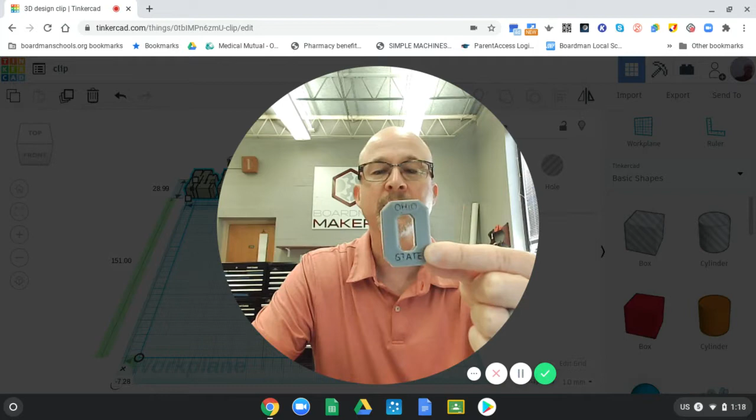Let's get to it. Open up your Tinkercad clip design, and what we have here is your name, the clip art that we brought in last time, and now we're going to put those together.

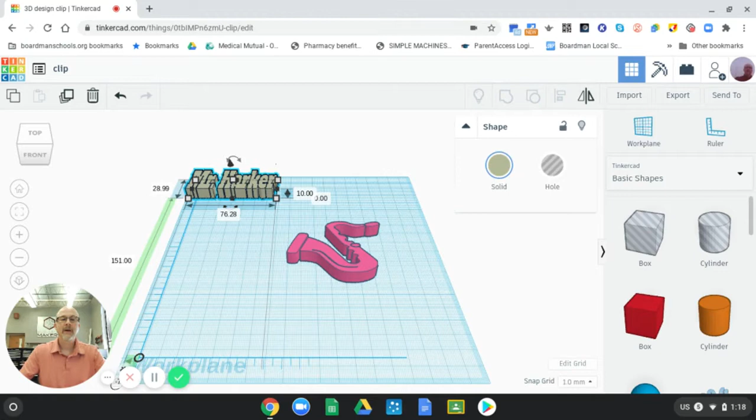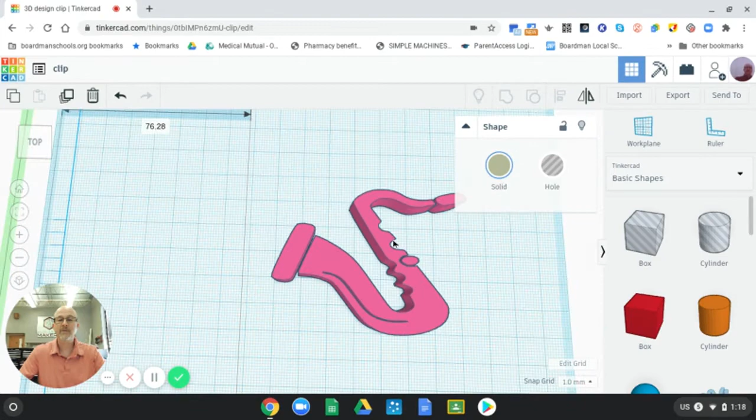If you remember from last time, some clip art pieces or names are not going to stand alone as a base, because when I go to scrape this off of the printer, this is going to fall off. So is that, and so is the mouthpiece. So I need some kind of a base to put underneath it, and I will do that.

Same thing with my name. Rarely will you be able to get words or letters that stick together perfectly where they would stand alone. So this is definitely not going to do that. So I want to creatively put this and this together to make some kind of design, and I'll probably put a hole in it so I can hang it up, which is what I usually do.

Let me show you an example. I showed you this before, but see how there's a hole in there, and I can hang that on a hook. I needed to put this kind of weird shape in here, and I made it really thin.

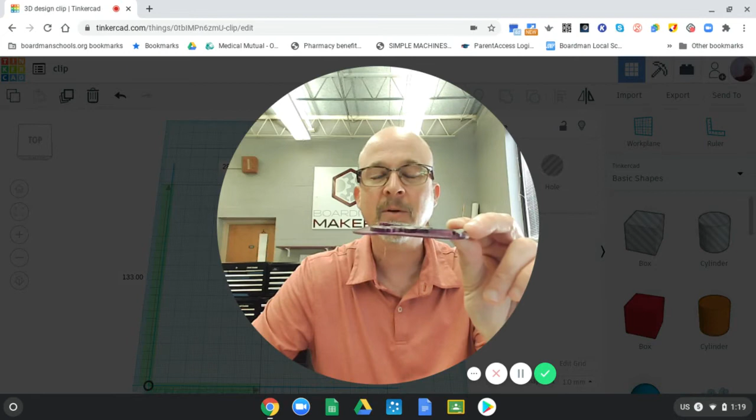When you emboss something, you really don't need a thick base. This is about 2 or 3 millimeters. And then the part that I embossed, the actual picture, is raised up at least 3 or 4 millimeters, because you don't want to waste material. It takes a long time to print, plus it costs some money. So you want to be careful there.

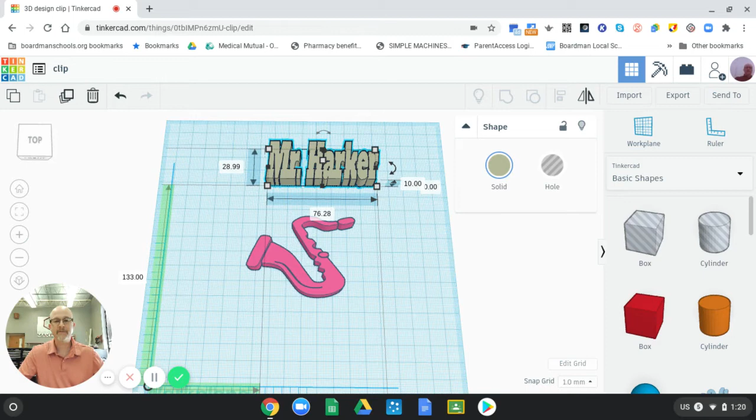If you brought in some kind of a base that works as a clip art piece, then you can just forget putting down a random base. So what I'm going to do is work on putting this together. So I am going to put a base down.

One thing I love to do is I like to use the polygon for bases, because you can make them all kinds of sides and you can stretch them. So I'll probably use that. But check this out, this is kind of cool, this is what I used for this. I made a unique shape. Let me show you how to do that. I might use it, who knows?

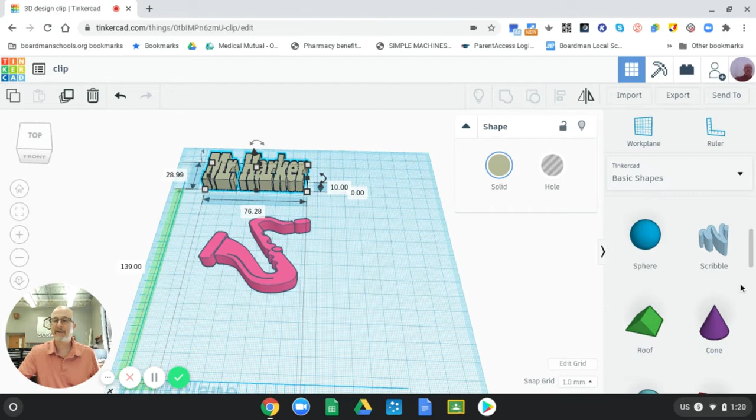It's called Scribble, it's in basic shapes. You click it, bring it over, and you click down. And when you do that, this comes up. So you can draw it, you can draw a shape, you can draw lines, and these are the erasers. The shape closes things in, and that's kind of what I want.

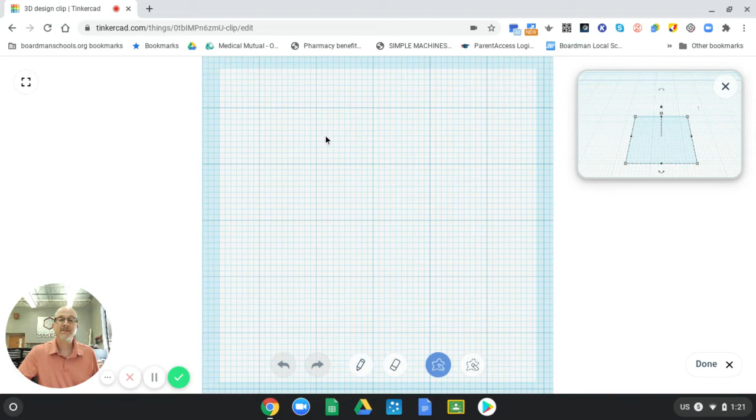If I click this, watch this. Kind of cool. So let's say I needed it to be like really like a wide shape like that. I let go, that's it. It comes out like that.

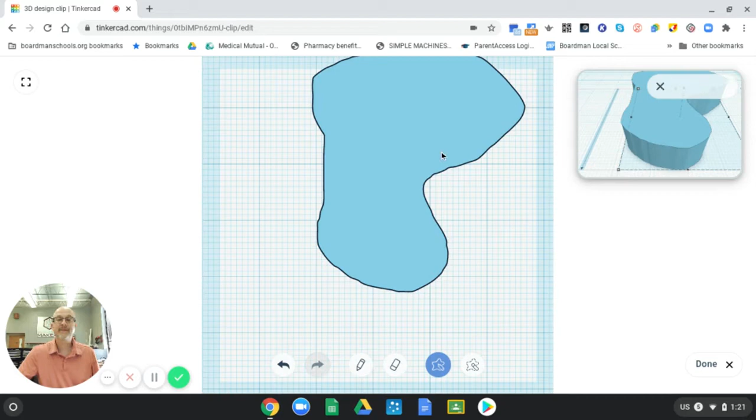Now that looks goofy, that's not great, but that's kind of what it'll look like. So you can make any shape you want. I push the undo arrow.

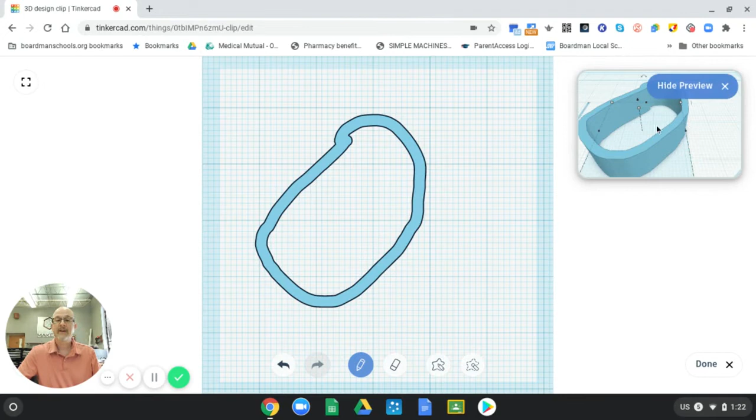If I do this pen thing, the thing is it's not going to fill in, it'll just be those lines. When I let go, it's like a hoop. See what I mean? So that's kind of neat. I'm not going to use that, but I just wanted to show it to you because I have used it before. But I am going to, let me backspace that out.

I'm going to bring in a polygon. I'm going to put it down.

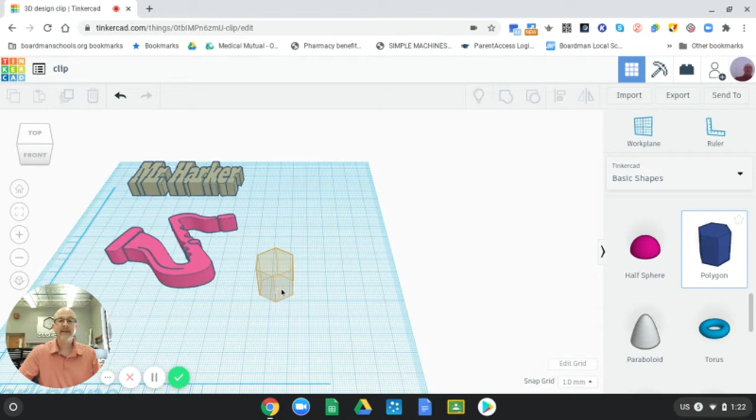Since these things are going to be embossed on here, I'm going to make this quite thin. So first, like I said before, I can make this any amount of sides I want. Let me go with 7. Let's see what that looks like.

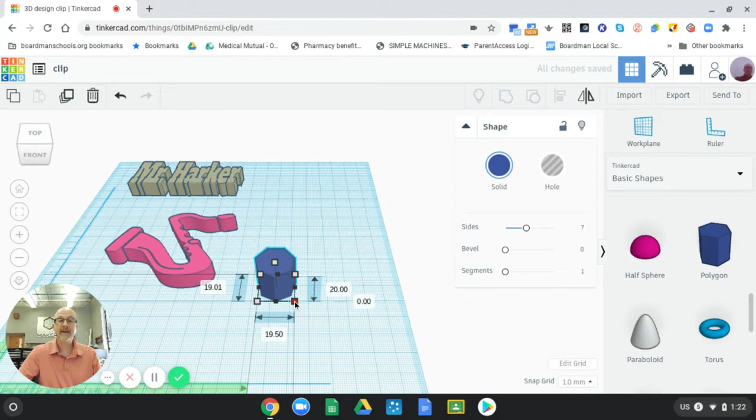So what I'm going to do is grab an end and make it a unique shape. Yeah, that might work. So what I'm going to do is make this like 2, because I don't need it to be thick, I just need it to kind of glue this stuff together.

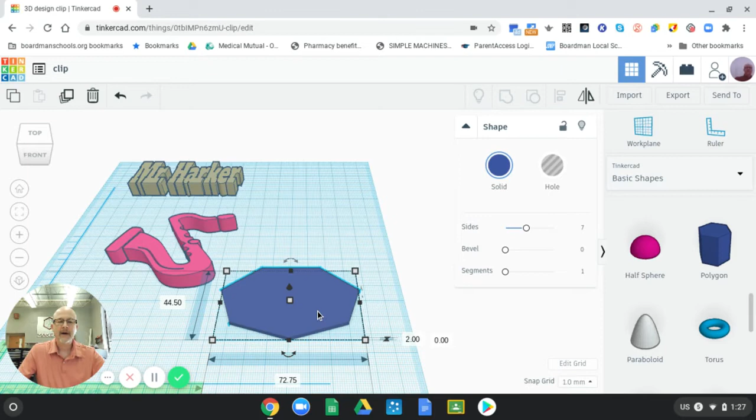So let me pause for a second. I really want you to pay attention to the amount of material that you use. I do not want any part of this design that you create to be any more than 75, and I want the total height to be no more than 6 millimeters. Keep that in mind, and I will put this information in the Google Classroom announcement. I do not want it any more than 75, and I do not want the height to be more than 6 when it's all said and done.

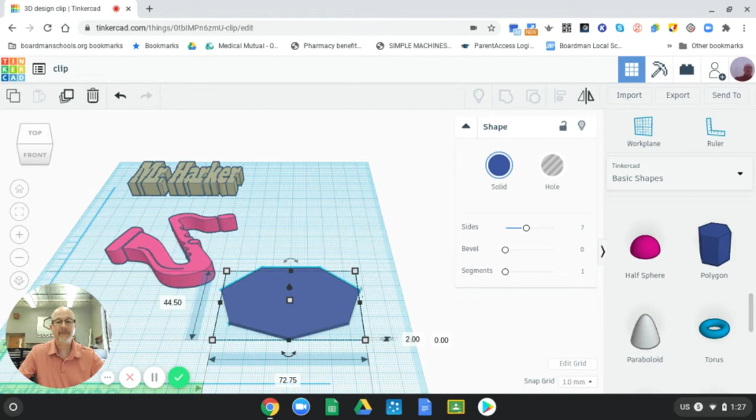All right, so I can just type this stuff in. I will go 75 to give myself as much as I can. And I think I'm going to try 66, just to... I'm going to go 9 sides. I just do not like that. Let's see what happens. There we go. That looks a lot better.

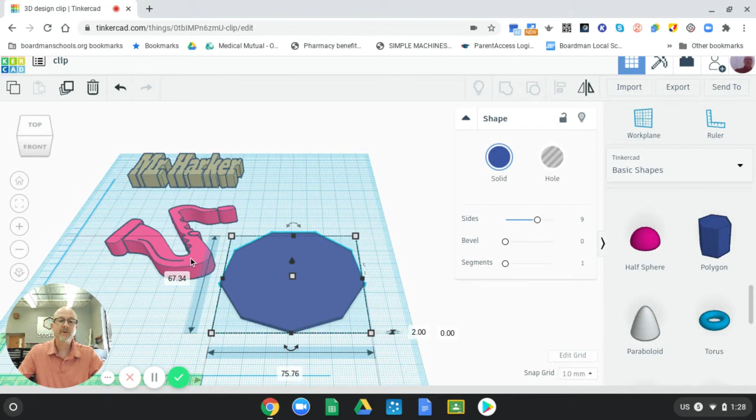All right, so I need to fit this stuff on here if I am going to emboss it, which is my plan, emboss it. If you're going to emboss, once again, the base should be pretty small. 2 millimeters will be fine.

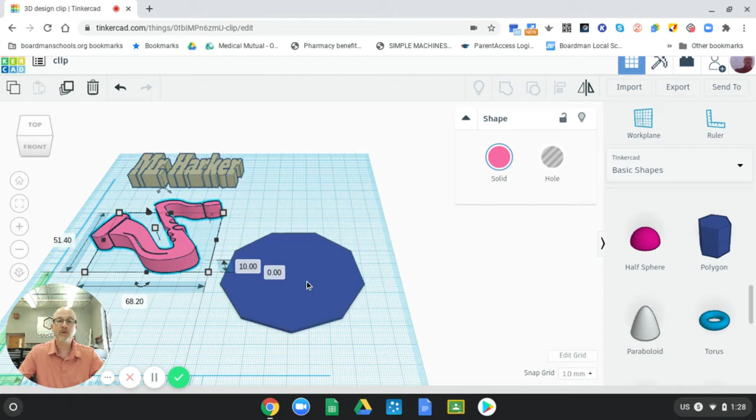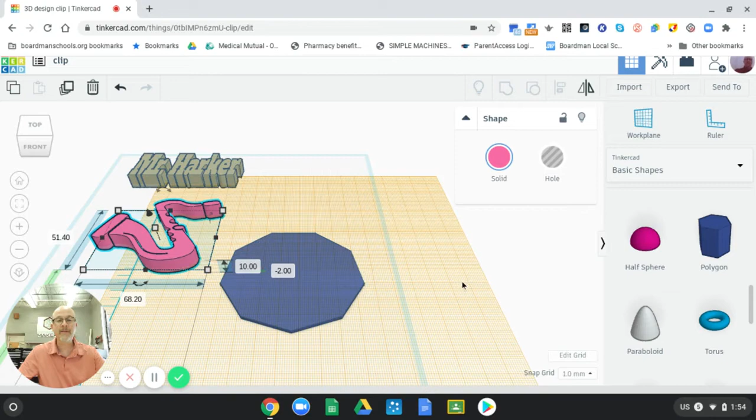So what I'm going to do is put a work plane down. When you emboss, you need to put a work plane down. So I just need to size this up to fit on here. I've dropped the work plane again. And the thing is, when we brought the words in and the clip art, they came in on the bottom work plane. So as you can see, they're not raised up. So this is what we have to do. When you import stuff from Google Drawings and from Google, they're going to come in on the lowest work plane.

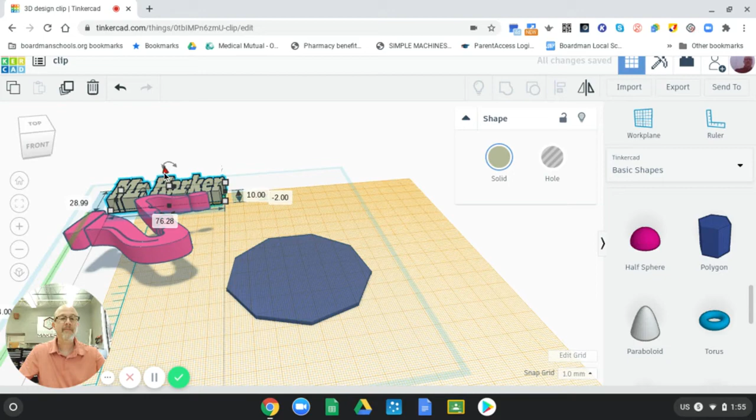So you click on it and you're looking for, you might have to twist some things around, looking for this black cone. Grab it, raise it up in the air. Might as well do it with the other one as well. Now it's floating up, okay? So what we need to do is, as soon as you do that, when you click, since you dropped the new work plane, you click D for drop, and they're both just going to fall down on that plane.

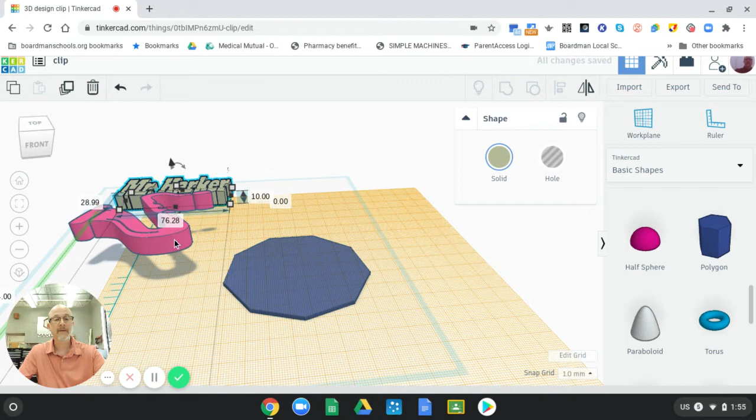Let me click on the other one. You have to select what you're going to drop. D for drop, and now they will sit flat on there. So that's very important. When you're embossing something, you have to use a work plane when you're adding material to other material.

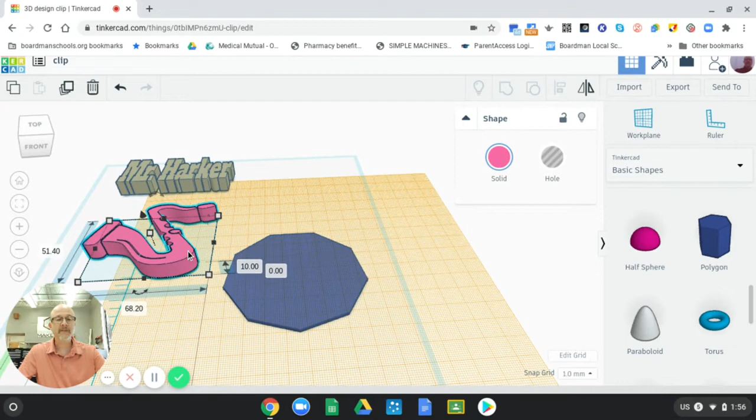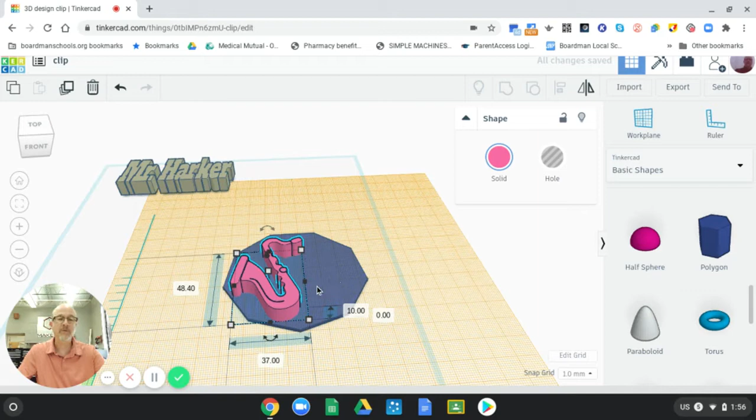So at this point, I'm going to just move this over. And this obviously has to go way smaller. Now, if you want to keep it the same shape, you hold Shift down and it'll lock it into place and keep the same shape, but just make it smaller. Or you could free-for-all it by not holding the Shift key down. This way you can... oh yeah, that's cool.

That's the way you can move it around and reshape it a little bit. So I'm going to do that. I like the way this is looking. I'm going to jam that in there like that, so it's on the base really well.

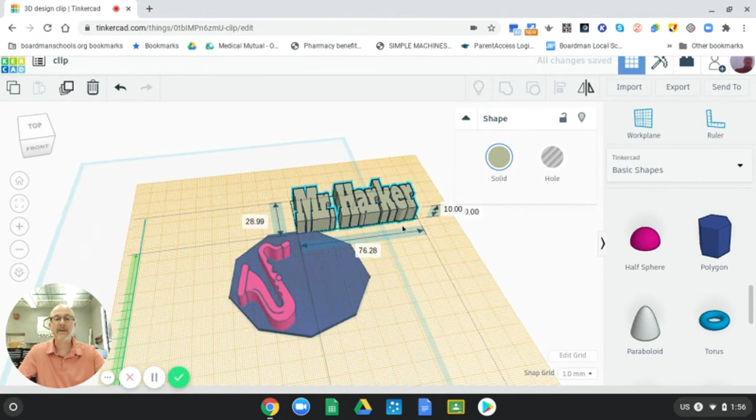And let me show you this. So I already dropped my name. I want to get this to fit over here, but it's not oriented correctly. So I will need to shrink it, I assume, but I need to turn it, like this. So you look for these arrows, and oftentimes you do need to move your mouse around, right click and pan. I'm looking for this one.

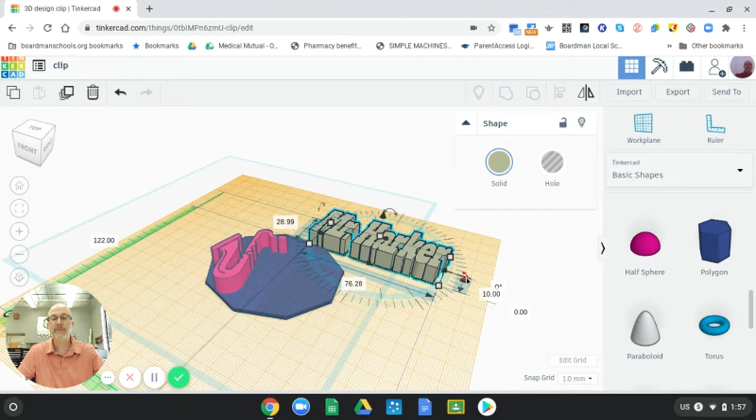And when you put your mouse over it, it shows you what it'll do. There's a couple ways to do this. See, I can't see it really well. There we go, so you have to move your mouse around. If I click this and just tap it on that arrow, just once, boom. Whoop, let me do it again. Boom, okay, so now it kind of is locked into that tool.

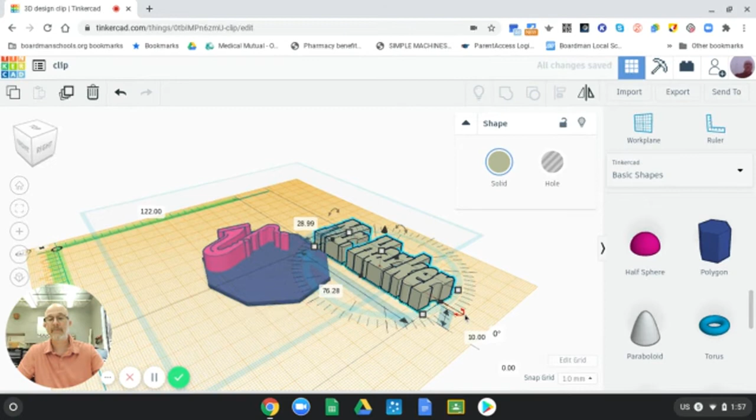I can type in right here. Whoa, I could type in the degrees it is if I wanted to turn it 90 degrees or whatever. Or I could grab the arrow, and the farther out you go, the more detailed it'll be. If I put it close in, it chunks like this, like that. But the farther out you go, the more control you have. So I'm getting closer.

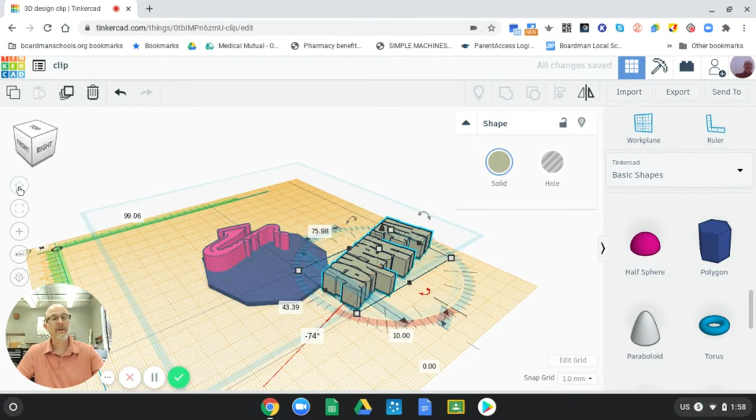All right, I'm going to click the home button, I'm getting a little lost here. Okay, there we go. Bring it over here. It's way too big, so what I'm going to do is grab a corner, shrink it up, and get it set on there.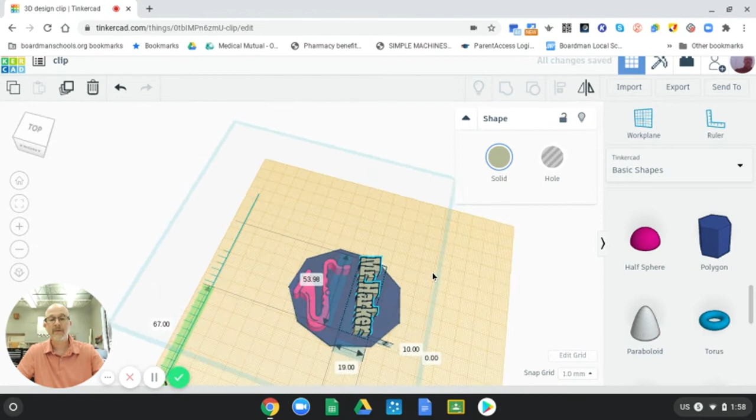Okay, now it's fitting on there pretty well. Do I like the way it looks? I think it's okay. All right, now what I want to do, they're both on the right plane.

I'm going to get rid of this work plane, go back to the normal one. W for work plane. Or I can just click up here and then click off into space over here somewhere.

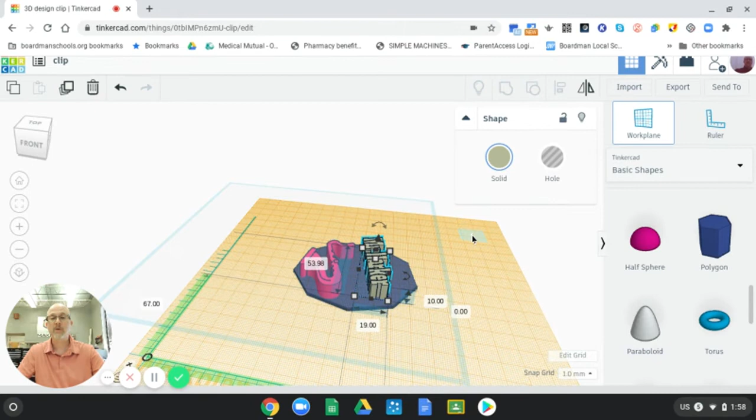Now, when you're doing this at home, you're going to have to pause and rewind, and this is not easy to do the first time. You're going to have to play around with it. So instead of me repeating myself here, just back it up, push play, pause, and work yourself through it. That's just the way it's going to have to be.

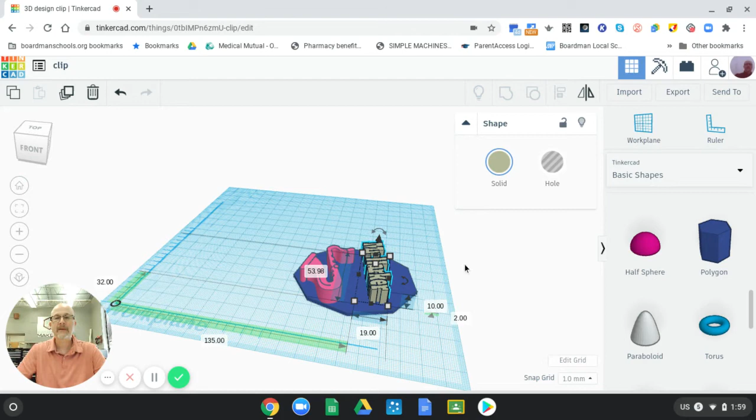Okay, so this is all embossed, but as I stated before, I want the total height to be 6 and no more. So I've embossed this. Right now, the words are at 10, the base is 2, that's 12. If I were to group this, it'd be 12. So 2 plus what equals 6?

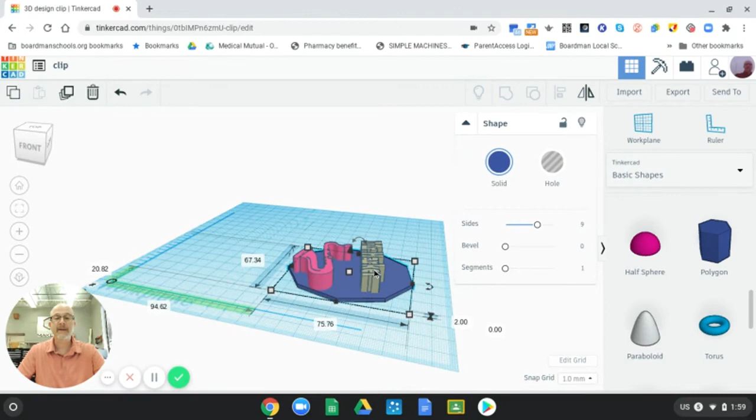4. So I need to click on my name first and find the height, and I'm going to go 4. And then do the same with my clip art piece, saxophone, and make that 4.

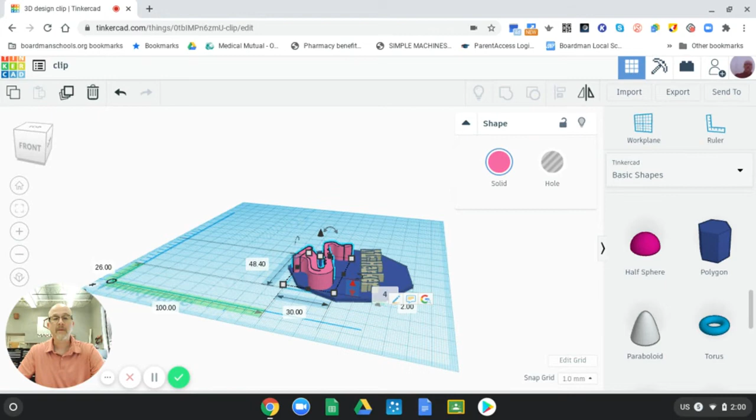All right, I'm not going to use the alignment tool because I'll just eyeball it. Okay, so I'm going to get a top view. Oh, that looks pretty cool. I love it. Okay, I'm pretty happy with that.

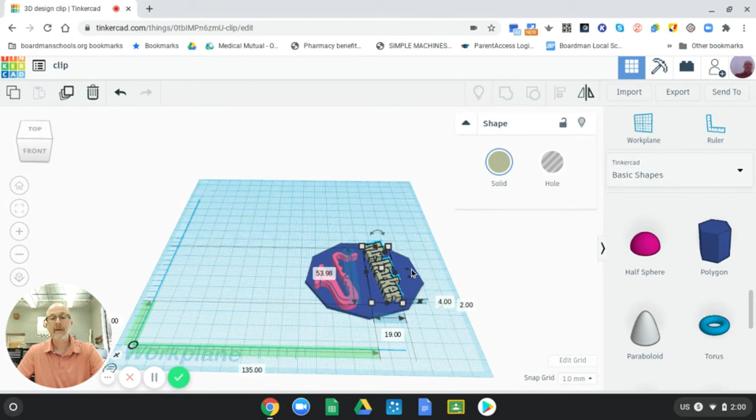I might want to tilt my name that way a little bit, so I'm going to click it and move it just a little, like that. All right, so I'm happy with that.

I'm going to highlight everything, group it. Now everything is together. Check it out.

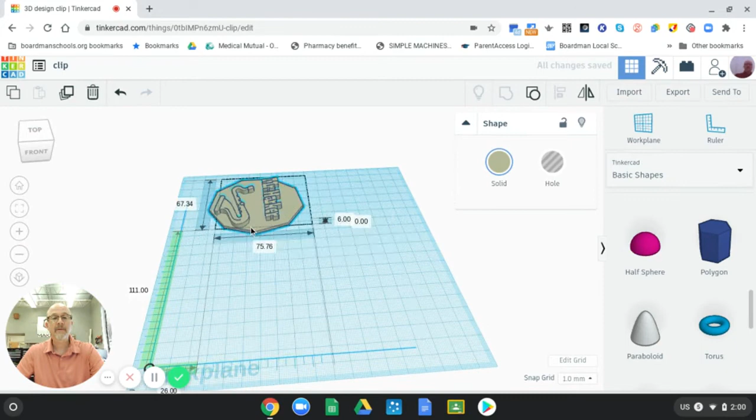Now that I've gone over some emboss work, I'm going to show you how I would maybe cut a hole through, just to remind you of that, and etching.

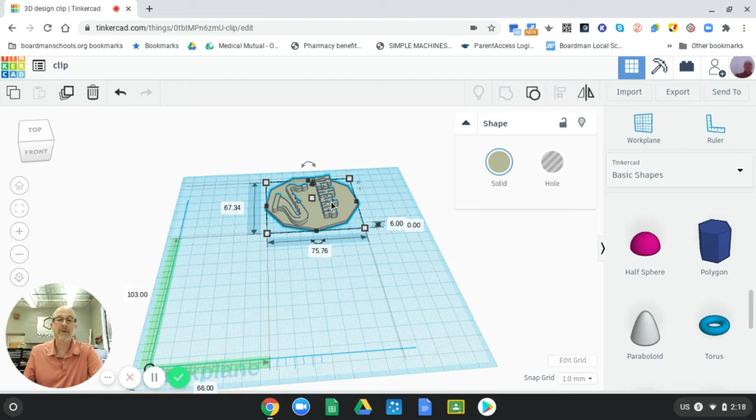So what I'm going to do, I think the easiest way is I'm going to duplicate this and then keep this and work with the other thing. So to duplicate, you push Control key down and tap D, and it should make two of them. There it is, I made two of them.

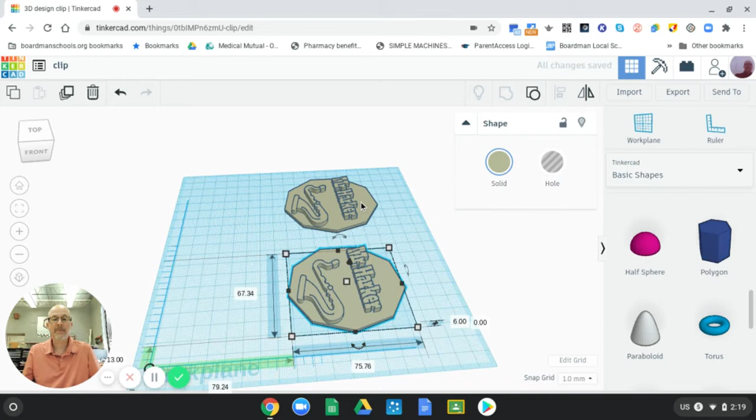So I'm going to put this one aside because I like it, and then I'm going to work with this one. So I'm going to highlight this whole thing, and I'm going to go up here to ungroup.

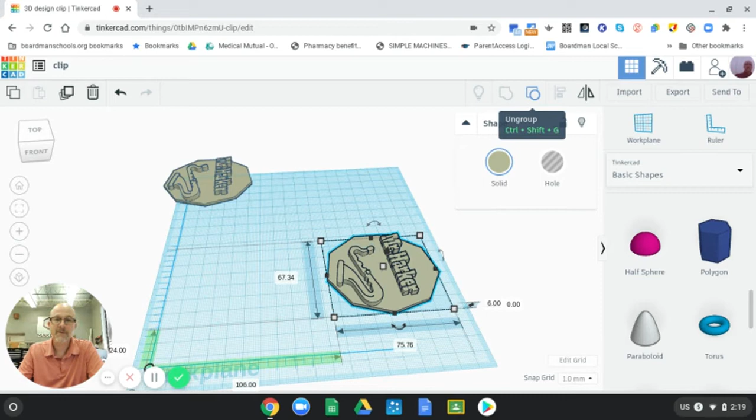Now let me talk about ungrouping again. Ungrouping, as I said before, it remembers all of your groupings from the time you started the design. So that could be, shoot, a year or so. It remembers all that. So when I ungroup it, I should be able to activate all these parts again.

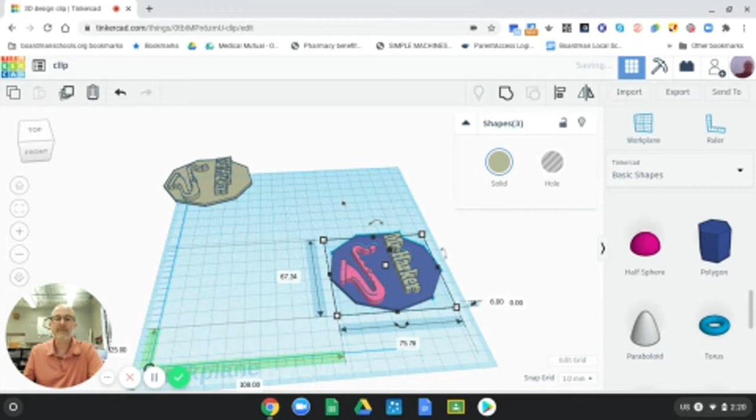So I'm going to just quickly do, whoops, let me double click it. They're not separating, sometimes you have to do this a couple of times. Let me click away. Oh, now it's lagging. Okay, now I can separate these.

Okay, now I'm going to drop these down to the bottom work plane because remember I raised them up when I created this other thing. D for drop. I'm going to drop this one to the lowest work plane.

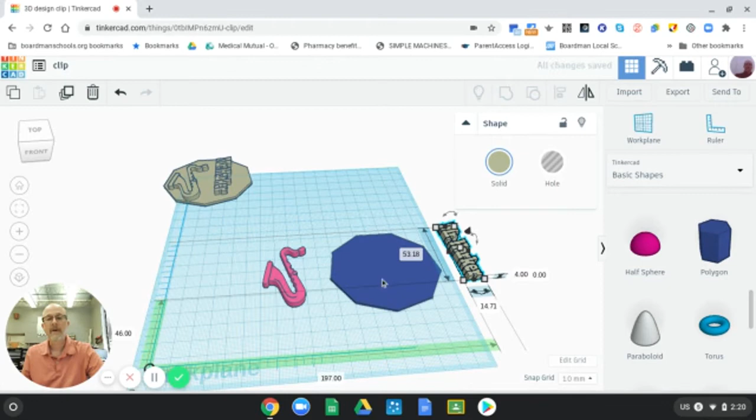All right, so I'm going to pretend like, since I already sized this, if I'm going to hole something through, for instance, I could leave this at 2. That would be fine, it's thick enough. All I would do is make these into holes if I'm going to hole it all the way through.

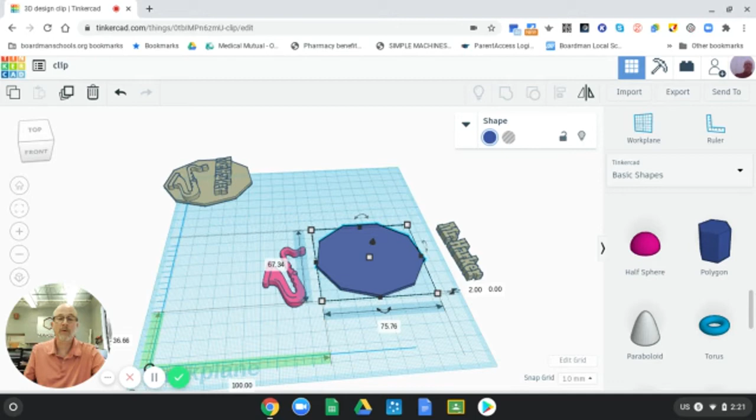So I'm going to click on this saxophone and click hole. I'm going to click on my name, make it a hole.

And now I have to realign them. Now remember, these are, what, 4? So 4 is taller than this base, which is 2. So it's going to be able to cut all the way through, no problem.

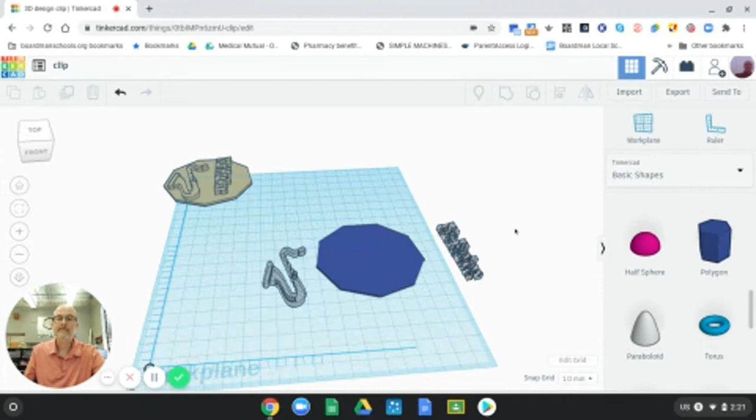Or sometimes, anytime I hole something all the way through, I will make it a little bit taller at times. Boy, is it slow working now. Here, hold on. Okay, sometimes I'll do this, make it a little taller.

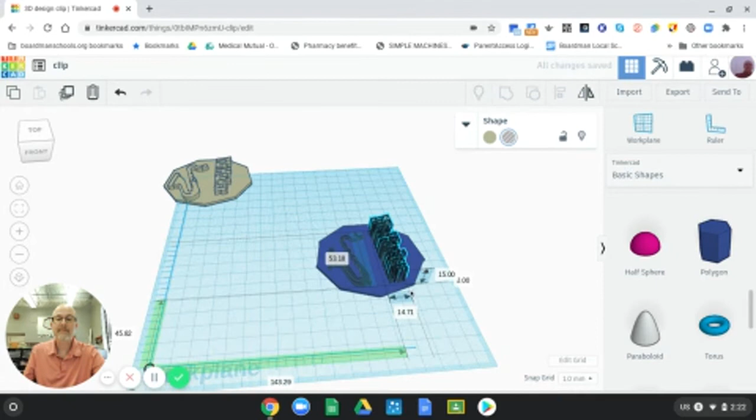It doesn't matter. Okay, so I'm going to slide these over and align them like I want them. Remember, they are holes, and since they're on the same work plane, I drop them down, they're cutting all the way through. So to hole this out, all I need to do is group it.

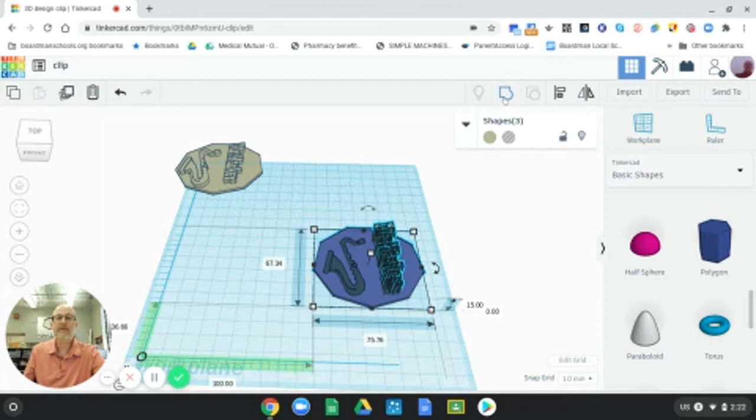Okay, when I group it, it will cut all the way through. It may not be a good choice to cut all the way through, but there it is.

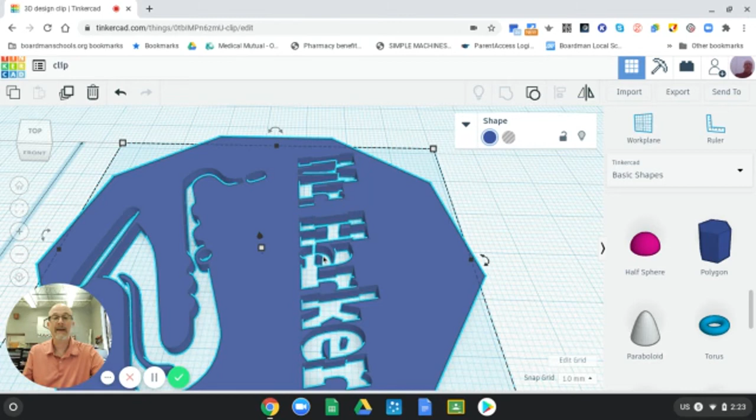See that? Kind of neat. The problem is, let me analyze this. Since I cut it all the way through, when I peel it off the bed of the printer, this part of the E will go away. It's not attached to anything. This part of the A, so that's not going to look great, unfortunately. The rest will look fine.

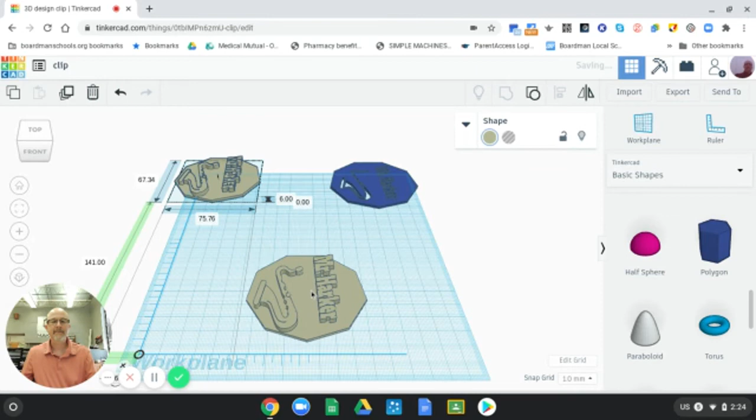Let me push home and show you etching real quick. So I'm going to do the same thing but etch, and go through that. I'm going to duplicate this again, Control D, and peel it apart. Okay, now I'm going to ungroup it.

Mr. Harker, I come to bear a gift that's really yours that I'm returning. I'm sure you knew. Sorry for the interruption.

Now I ungrouped it and I have activated everything, so I'm going to etch it. Let me review what that looks like. Remember, etching is just carving in, but not all the way through. So like this, the Ohio State is not all the way through, it's just carved in. So that's what I'm going to do here.

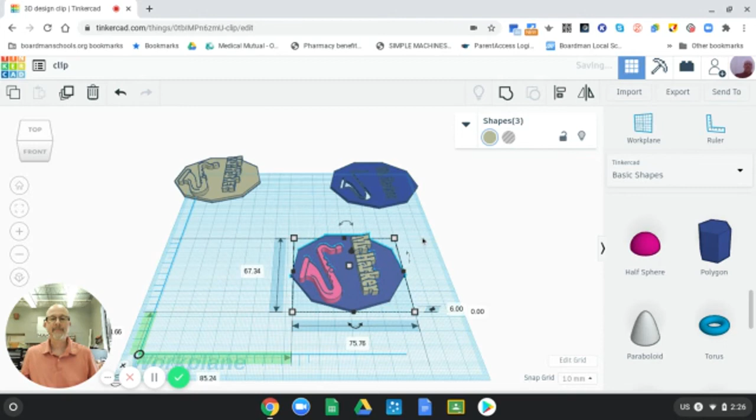So what I'm going to do is pull these away again. Whoops. When you ungroup, it's a good idea to click away and then you can peel things off. Please excuse this interruption, teachers.

So now I'm going to go over the etching process with this same thing. And to review what that is, let me make myself bigger here. It is carving in, like in this. The Ohio State is carved in, but not cut all the way through. And sometimes that's a good option instead of holing it all the way through.

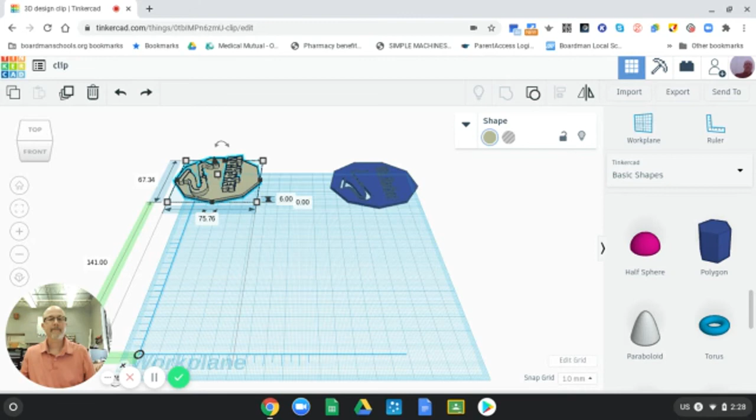So I'm going to show you how to do that with the same material here. I'm going to click this and duplicate it, Control D, peel it off, and then I'll just manipulate this. So I'm going to ungroup it and get these things out of here.

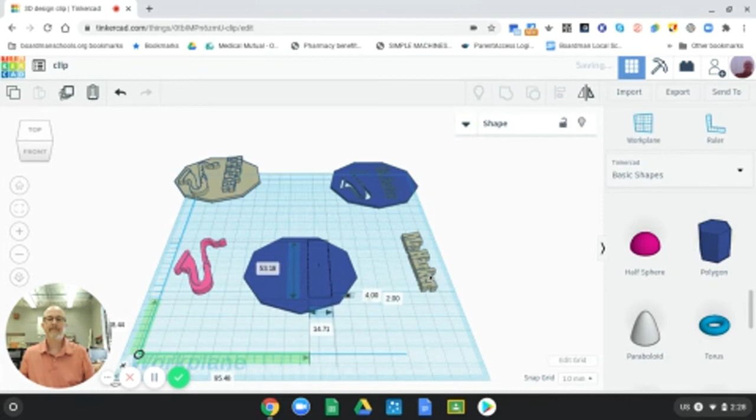The saxophone off of there, and Mr. Harker off of there. And remember, this is really important. Let's drop it down.

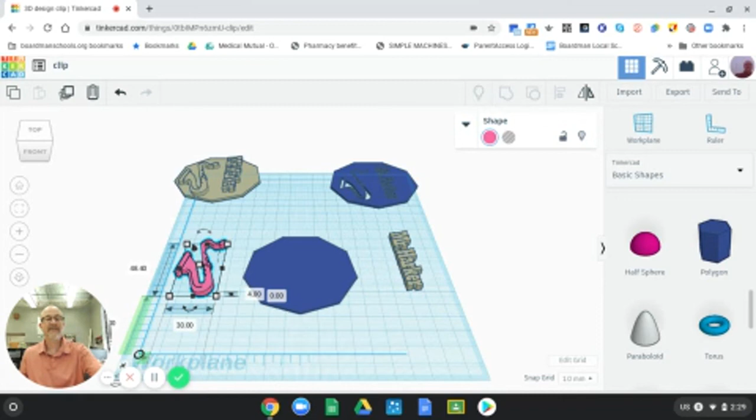It needs to be on the bottom work plane. All right, when you etch something, you want the base to be thick because you need some material to cut into. So it's really important that you have these things that are going to be cut into it on the bottom work plane, the same level as your base. That's important, and that's what we just did. I selected them, clicked D, and dropped it to the bottom work plane.

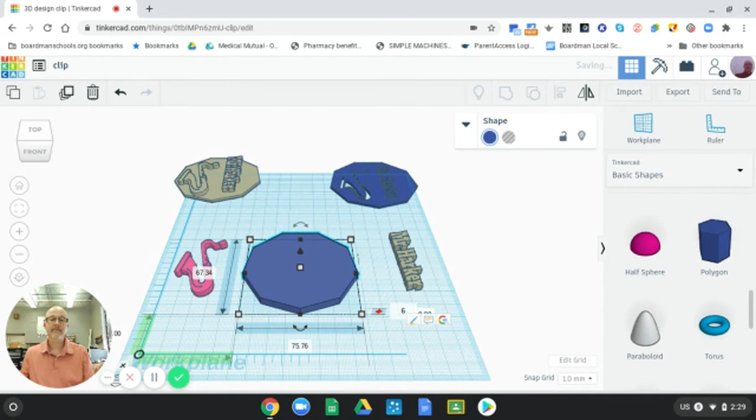Okay, I'm going to make my base 6 because that was the max that I wanted this to be. So instead of 2, I'm just going to type in 6 millimeters high. All right, now for these, we're going to make them into holes, the words and letters.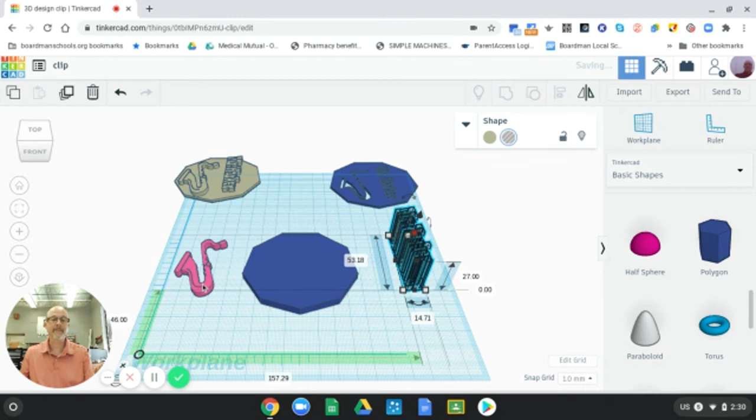All right, make that into a hole, and I'm going to make it extra tall. So I'm going to grab the middle white dot and stretch it up. If you happen to mess up, then push the undo button. So let me click this. Let me show you what I mean. I'll make that into a hole.

Let's say I accidentally click this and do this by accident. Whoops, I didn't want to do that. Just click the undo arrow. Whenever you're holing or etching, usually make the hole extra tall.

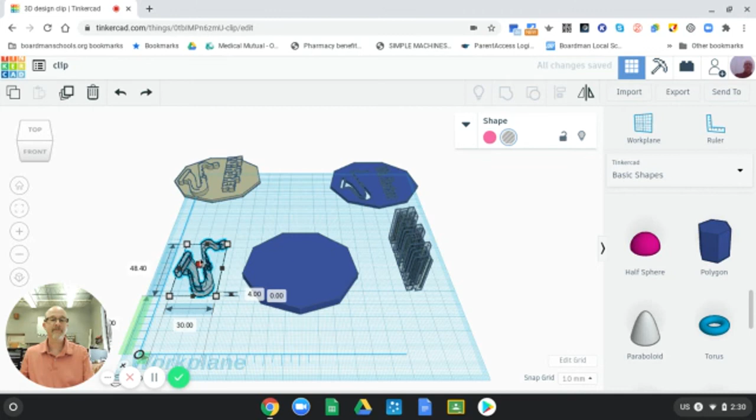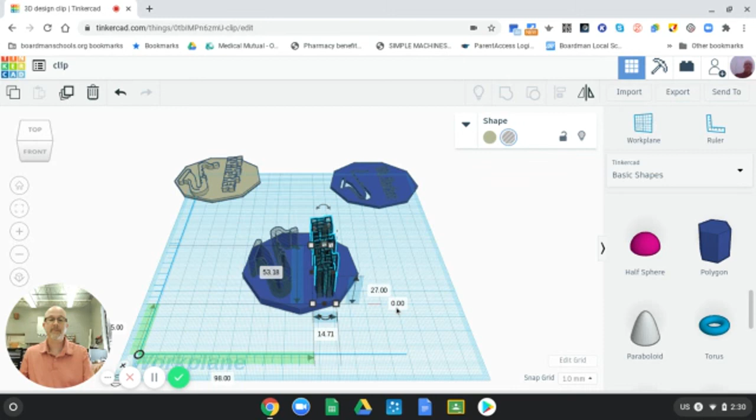Okay, now what I'm going to do is just slide this over, kind of line it up, and remember these, when you're etching, you select your hole and you're looking for the 0.00. We're going to raise this up 2 so it goes up into the solid. It bumps up, zip. Same thing with this saxophone I'm going to do.

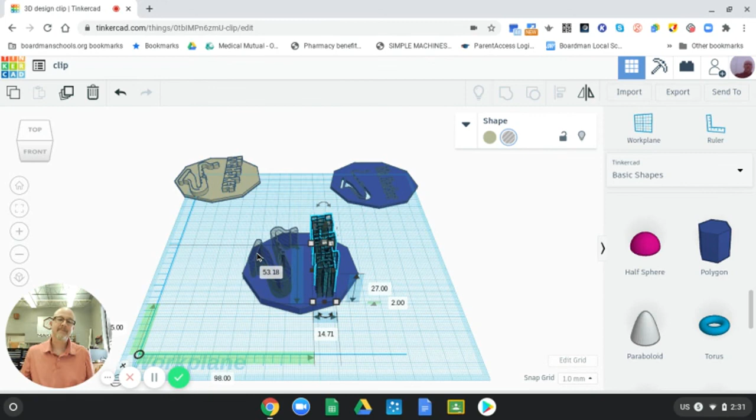I'm going to select it, try to select it. Please excuse the interruption. I'm going to raise this. Oh my gosh.

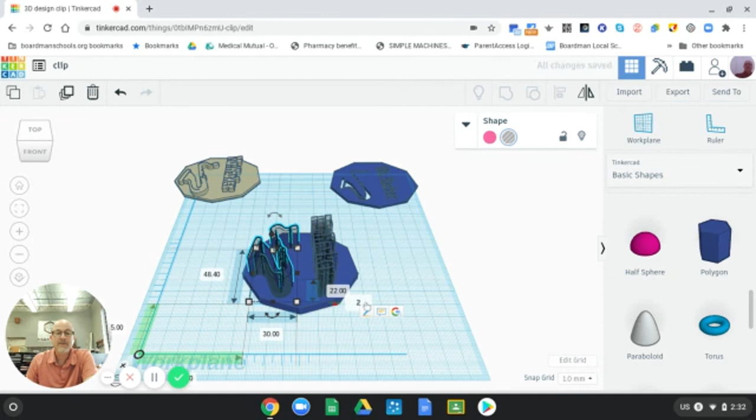So I've selected my next figure, and you need to find that 0.00, and I want to raise that up as well, too. Bump it up, zip. So now it's raised 2 millimeters into the solid.

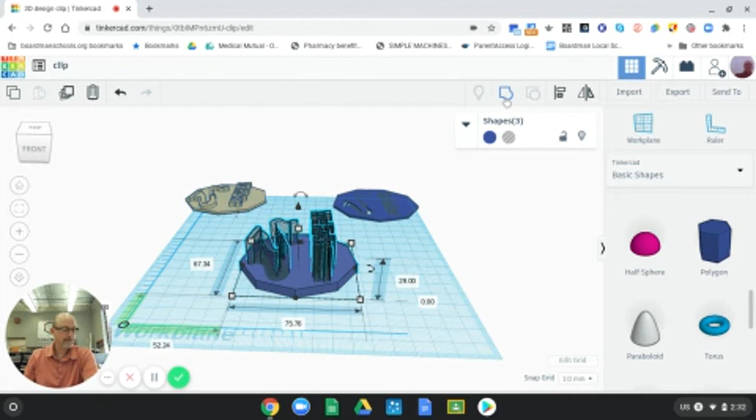And now I can group it. Now when you group it, just make sure it's just the things you want to group. I did not want to include these old ones. When I group it, it's going to cut into there.

And it just cuts into the solid, and it will show up because it's deep enough. It's 4 millimeters cut in. That looks pretty cool, actually.

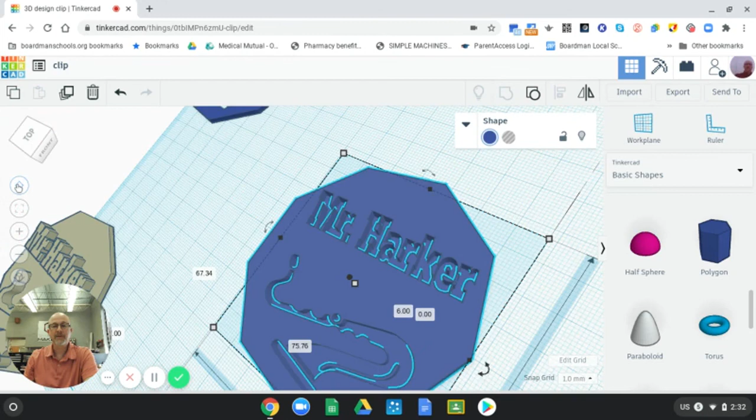So that's a review of etching, holing, and embossing. And now I have 3 choices here. All right, until next.